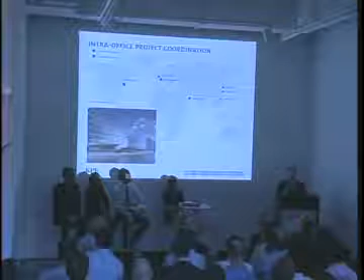We have 6 offices firm-wide. New York is the base for our operations, and what makes KPF unique, from what I've seen working extensively in London and New York, is that the offices work very collaboratively and live on any given project. Being an international firm, our projects are international as well as our offices.

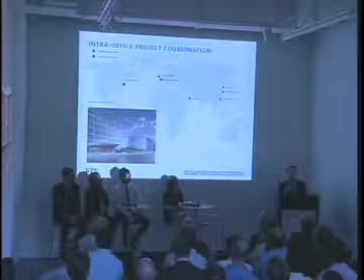Our projects range across all the continents, and where the projects are also influences the nature of our collaboration - who works on what and how we do it. This, for example, is a project in Paris, France - Parc du Millénaire. We're currently working on this project live with London and New York. The BIM strategy is a very total one for the firm - it helps us coordinate and collaborate so we share each other's specialisms.

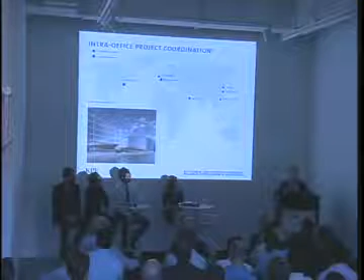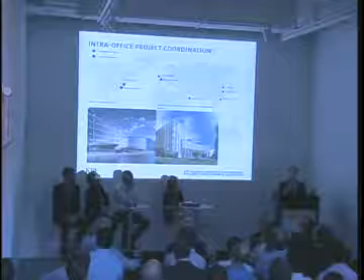The rest of the team will talk in much deeper detail about the technicalities of the software and how they use it. But BIM is the heart of our operations - Revit is the heart of our BIM strategy, with a plural BIM approach. When we're working live in London and New York, the Revit server serves as a live environment in which the whole office can work, and that goes the same for domestic projects too - the whole office has the ability to work simultaneously, live, in any given Revit model.

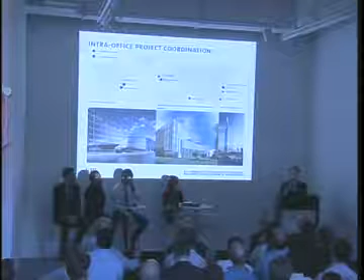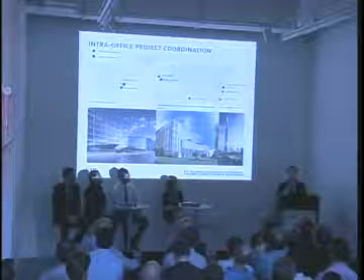So finally, the Asian projects too, and this example is the Lotte Tower in Seoul, Korea. One thing I want to expand on is working on the Revit server, and the huge breakthroughs that have happened in BIM, the big data, the cloud, which is a very commonly used term now. The big data for us means projects in Shanghai, Seoul, and the office working also live in this model. Now with Revit 2013, we've seen improvements in latency and the ability for Revit to comprehend files being sent transatlantic and transpacific. So some very exciting developments just in the industry as a whole, and Revit Server has really provided a great capacity for increasing the intra-firm coordination.

Not only intra-firm, but many firms hinge their collaboration with external disciplines, the structural, the electrical, the plumbing, the mechanical, and we like to put ourselves in the heart of that, the BIM methodologies, where we use either Navisworks or BIM 360 or a range of cloud-based model collaboration tools. It's really important to us to have that information flow in the cloud collaboration, internal and external.

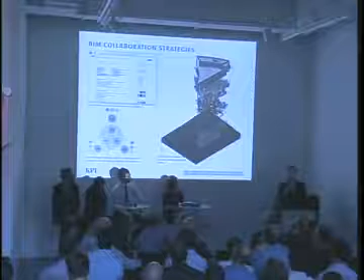The Revit project's based in the Revit server, but alongside the external collaboration, we have the internal knowledge bank, the KPF intranet, and the BIM procedures, the BIM execution plan, are used as a base for how we communicate and how we collaborate. The collaboration strategies are at the heart of what we would consider industry standard, as thorough as what they are in this current time.

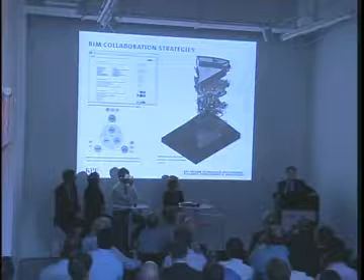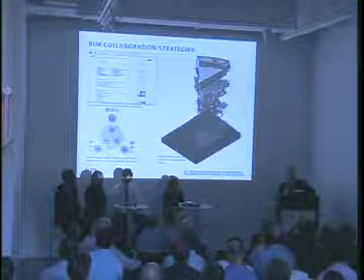As you see on the bottom left, the slide shows the AEC UK standard for Revit sharing. It's a shared environment. This is a typical IPD, and it's based on whatever the client's demands are, or the client communication for their needs, on how we share and how we integrate. We have a strategy for the extreme live IPD, which comes under the correct legal framework for the AIA contract, for example the B195 and the C195, and just the live collaboration is a very exciting development that is occurring, and we do look into it, but this is the standard procedure where we share each other's models in a shared

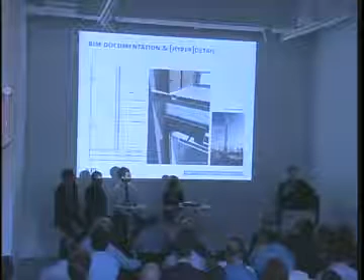platform. So as you have heard the word Revit quite a lot, I do like to emphasize that, and personally too, I have an extensive background in Bentley Systems, and the firm has done a lot of projects in generative components. I do like to advocate for a cross-BIM platform with a variety of approaches depending on what's relevant for each particular project.

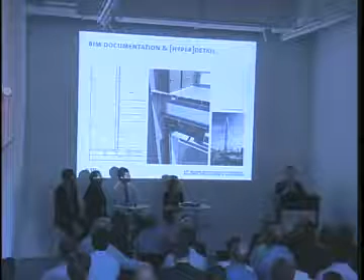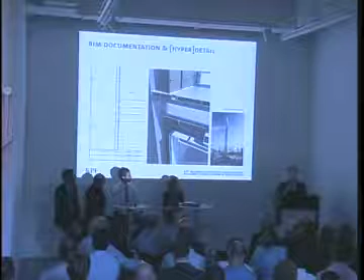Most of KPF's projects, I would say, really hinge heavily around the exterior envelope research and the significance of the envelope, especially with regard to environmental strategies and the concerns of the client too. It also involves very close collaboration with the fabrication technologies and curtain wall consultants, especially for a project on this scale for the Lotte Tower. Charlie's going to expand on his very thorough techniques he's developed in close communication with fabrication technologies, which involve the fabricators being able to use C++ scripting for their direct CNC cutting. Some very exciting technologies just in terms of raw integration in model sharing alone.

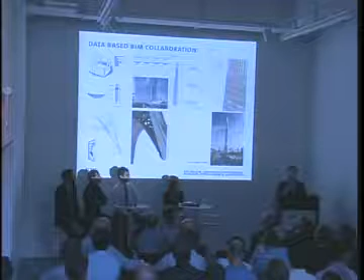So this extended to the structural research as well. In the Lotte Tower project, the exterior envelope is the heart of some very exciting developments in the physical and the digital world. A lot of optimization in terms of form, the environmental stresses that happen on the building, and how we as designers can best adapt to where this building's going, what it's doing, and what it looks like. It's very important for the local geography and the local culture.

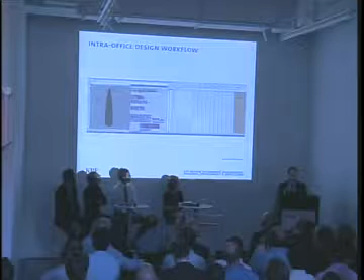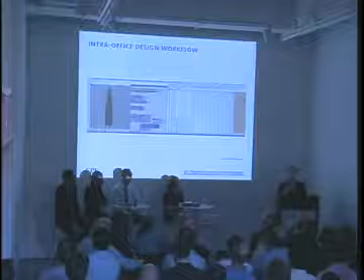So on the top right, you'll see a strategy that's really exciting, a very complex process that a team has worked on, which is a Grasshopper to Revit scripting workflow. There are many different options out there right now, some with just out-of-the-box add-ons, and some going back to the raw scripting C++ environment, or .NET, whichever one works. This exemplifies this process where we have a very extensive design process in Rhino, and Grasshopper is integral, like a lot of firms. Our challenge is to bring it back to the mega scale, the large, the super tall, and very often in a lot of the foreign or Asian projects, the exterior envelope is a big focus of our design strategies.

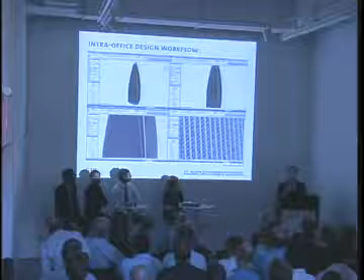And here you see coming back in a BIM environment, not just the digital model, but BIM—it is significant. The information and metadata contained in our models we take very seriously, in terms of the collaboration with construction managers and what that metadata is as part of our Revit strategy, and overall the communication. It's a language that is a very significant part of the digital workflow.

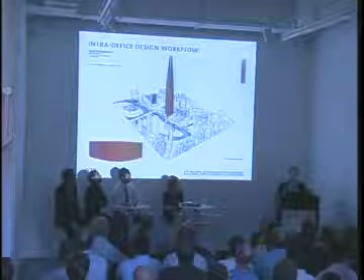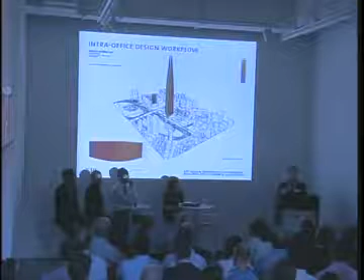So to quickly walk you through some of the environmental design optimization strategies we use at KPF—I'm part of our sustainability group, and the structure of that group within our firm is a network development. The idea is there's a group of us working on sustainability full-time, and our main goal is to help implement strategies and analysis that will help that come along with the teams.

Beyond that, we have an extended network that we're constantly giving software tutorials and education to, to further that development so they can eventually do some of the tasks we're doing—some of the more simple analysis—and then we can spend our time moving forward with some of the more advanced analysis.

The idea of the structure within the firm is there's a lot of back and forth. We're working on a lot of different projects with a lot of different teams, at many different stages of development.

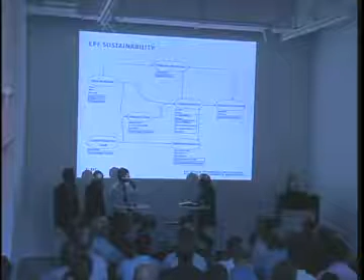So they'll give us a model, we'll run an analysis, we'll give them that model back. They'll tweak something as a result of that, and we might do a more detailed analysis to see how that's developed. Beyond that, we're working with all the different teams as well—the visualization groups, our extended network, and the day-to-day teams.

Beyond the software that we use, I think one of the things I wanted to talk about was the importance of the information you're putting into that model, and how that knowledge needs to be intelligent as well.

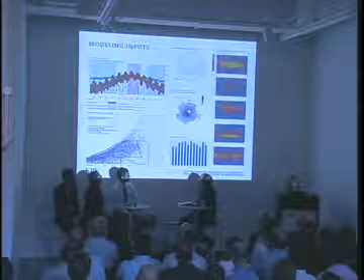One of the first things we do the minute we learn about a new project is create, if we don't already have it, the weather data for that project, and we sit down with the team to walk them through the significance of those images. What is the outdoor air temperature, what is the humidity, what are the passive strategies that will naturally extend the comfort zone, what is the rainfall, the wind, the sun path, and the radiation.

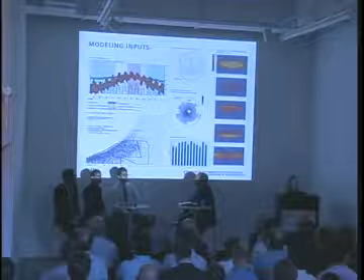These are all looking at a very standard distribution of these systems, and then we can begin to develop them for the individual building as the project develops.

This information is also available, along with a number of other pieces of data, on our internal intranet—the idea being that beyond just working with us, that information is available for them any hour of the day, every day of the week, should they want to access it.

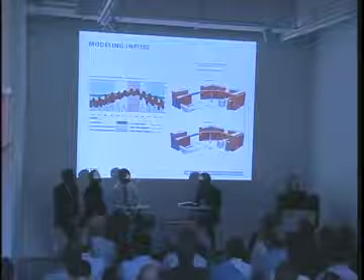One of the things that's very important, besides just understanding the context of your model, is understanding the climate that your model is in, what type of program you have, and what significance that's going to have on the modeling of your project.

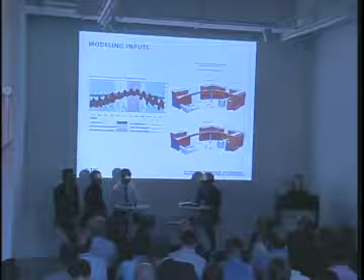This particular example was in Shanghai, China, an academic project. The climate had both a heating load and a cooling load because it has a summer and a winter, and because of that and the program, we wanted to mitigate some of the solar heat gain in summer but also allow for passive heating in winter. That meant you needed to be looking at both of those conditions as you were designing your shading devices to allow for both options.

On the other hand, this is a project in Abu Dhabi, and to a certain extent it doesn't matter what the program is because it's a hot climate all year round. This particular project was a resi, hotel, and retail, and our shading devices needed to be effective year-round.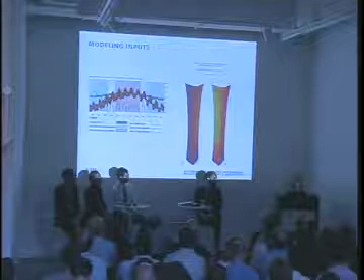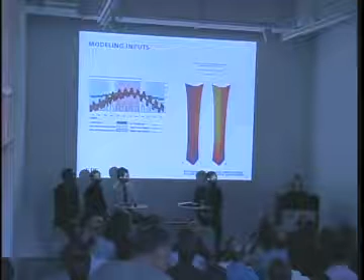This is an example in Beijing, China, which obviously does have a very distinct cold period that requires heating. However, it's a super tall office tower that is almost 100% offices, so it has very substantial interior heat load. So even though the way those shading devices change throughout the year changes with that climate, it still needs to be mitigating that heat all year round regardless. Knowing that information is really important to how you set up the models, regardless of the software you're using.

This is just a quick example of strategic facade analysis using very quick tools to begin to develop some quick feedback for a team using Solar Tool, understanding what is actually going to be effective before we begin to actually optimize a shading device.

The red areas on the right are highlighting 3 different facades on an airport project in Nanning, China. The idea is that none of these were true orientations, and they were all curving facades as well, so the way they were going to perform was not actually a standard predicted amount.

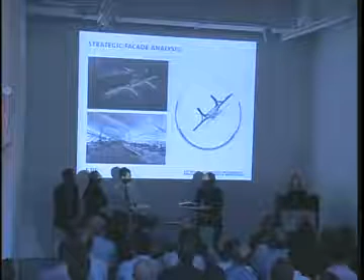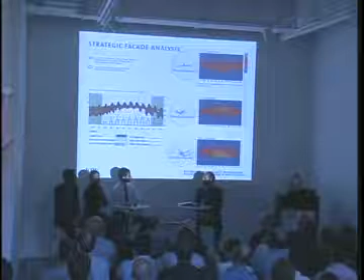The first thing we did was look at that climate data, looking at the coldest months of the year where some heat gain might be acceptable, and then looking at the times with the highest amounts of solar radiation, laying those two things out together on a sun path along with the orientation of the wall. This began to tell us where those shading devices would be most effective and at what times of the year before we actually began designing the shading devices.

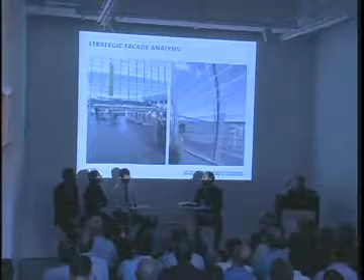This was just the quick result of that study, and the idea is that we're trying to maximize the effectiveness of those shading devices at the hottest time of the year, and they don't need to be as effective in the winter. And then that was the result across the building.

This is looking at how we would begin to do some of those optimization studies at the scale of the master plan. Before any analysis is done, we sit down with the team and develop a list of strategies. This particular project was just outside of Toronto, so it's a cold climate where you want to try to maximize passive solar heating, coming up with a list of strategies to help do that, regarding building orientation, program distribution, shadow coverage between the buildings, and the distribution of circulation space versus occupiable space.

Once that had been implemented and a massing model had been developed, we were then able to model that holistically within the site and begin to say, well, these are the individual buildings that need to be tweaked to further maximize these opportunities.

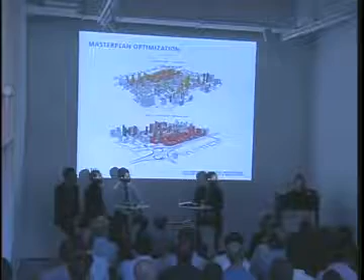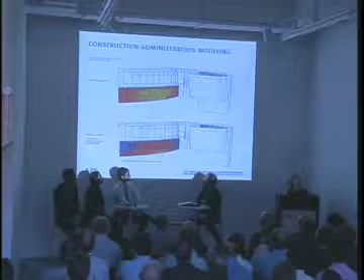One of the other things we do, as I mentioned, is work with projects at all different stages of development. This was a particular project that is in construction administration right now, very much in the process of being built. However, about a week ago, when the client saw the mock-up, they decided they did not like the shading devices that were going to be used. The problem is those same shading devices were also used for the LEED energy modeling, which is very linked to this project. It's an academic project, so they feel very strongly that it meets the target they've set out.

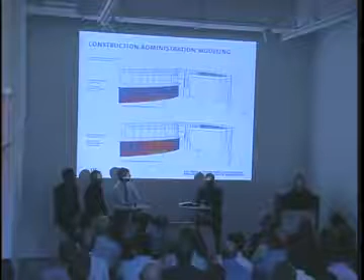So one of the things we were able to do was go back and look at what the initial performance of the shading devices was as currently designed, then test it for two variations they were looking at. We looked at whether the overall reduction in radiation was approximately equivalent, which would probably have a similar effect on the energy model, but also at the breakdown of that material across the different facades, so if they wanted to change the density on different orientations, they could have that opportunity.

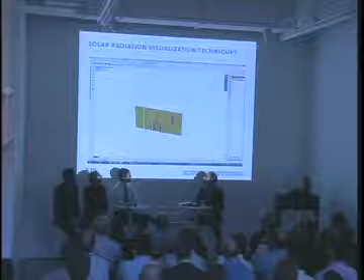One of the other things that comes up quite frequently when using tools like Ecotect is some of the quirks of the software. This particular example looks at the fact that the software runs its values of radiation as a direct result of the areas you're running it on. You can see here, even if you add up the average of the smaller pieces, the average amount of radiation falling on them is actually the same as the bigger pieces. However, some of them are being registered as completely in shade, and some are receiving a lot more radiation.

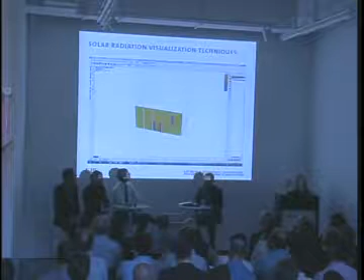So if it's a smaller scale, then graphically it's reading very differently. From my standpoint, what this means is we want our models subdivided in areas that are approximately equivalent, which can be an interesting challenge with a lot of curving facades. Ecotect is somewhat clunky software that doesn't always allow you control over subdivisions like that.

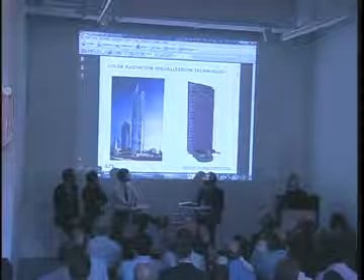One of the workarounds we've developed is subdividing things in Rhino, then working with our visualization team to bring that data into Ecotect more cleanly. This shows the same Rhino model already subdivided, rebuilding all those surfaces as 4-point squares in Ecotect and importing that data. That data can then run in Ecotect and import itself back into Rhino so the team can work with that information directly in their own model.

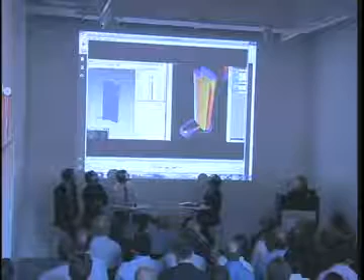And there you can see the model's been run, and then taking that data and importing it back into the original file.

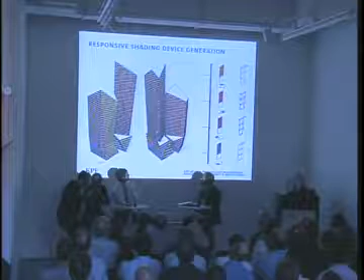One of the things technology allows us to do is responsive shading devices, allowing the team to work with this information much more directly.

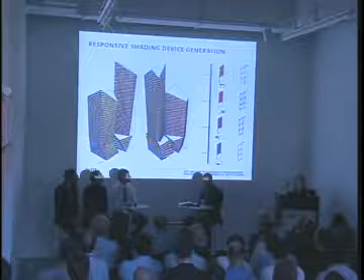In this particular example, it was a faceted building model that was self-shading itself in addition to the context, which meant a very varied amount of solar radiation across all the facades and even across individual facades. The design team developed different shading devices to correlate with those radiation amounts, with deeper shading devices on areas receiving the most sun, and shallower ones on areas receiving the least.

From a design standpoint, that data allowed them to play with different aesthetic options, looking at how it would be distributed with 3 shading devices, 6 shading devices across the facade, and with 12, and how those designs would begin to populate across a single building model.

My name is Charlie. A lot of my work at KPF encompasses working in some sort of computational parametric strategy. I work closely with the environmental network in our office, and also closely with the BIM individuals. Part of what Garrett just presented, the developing tools of interoperability, that's one of the things I work on.

But also taking all the stuff I've done over the past 5 years or so, and being able to integrate it into systems where now it's usable for users.

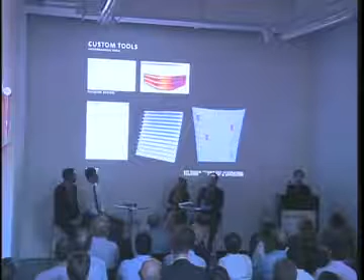I've always worked in code, and a lot of times when you talk to computational people, they talk about scripting and writing hardcore code, but it's usually a challenge to create an interface for everyone to use. Now with Grasshopper, it's pretty easy to create plugins and develop interfaces so no one has to go in and tweak your code around. You can easily attach parameters to that and so on.

One of the tools I'm working on with the environmental network is this shading device calculator, essentially. What it does is give us an interface where it can take any panel, any orientation, and with a series of parameters - louver depth, louver angle, roll angle, panel angle, orientation angle, so on and so forth - run through a series of different iterations.

It will output a number of optimal results. Some of those optimal results may not be visually appealing, but that's why it outputs a number of results, so the designer can take control and choose what is aesthetically appealing for the design.

Another aspect of what I do at KPF is trying to take the digital to physical. Digitally, we can do basically anything. Between the animation software and the geometry software out there, we can model almost anything, but how can we make that reality? Forces and physics and materials and so on.

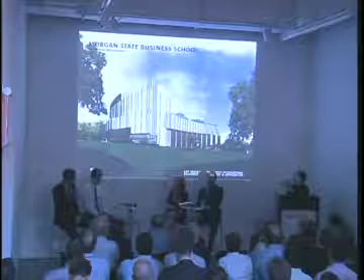This is a project in Baltimore at Morgan State University. It has a pretty limited budget, it's pretty tight. There are these metal panels throughout the facade - perforated metal panels - and the client loves them. The concept started with taking this painting.

We chose a portion of that painting that we thought would be a good contrasting option, and we essentially took the pixel values and generated perforations.

But we also thought about the constructability factors. If you have more than 40% perforations within the panel, you start to lose structural integrity depending on the thickness and so on. We also looked into, based on that image, the different perforation sizes, whether it was a regular orthogonal grid or a staggered grid, and took into consideration if the shapes overlap or not.

This is a laser cut mock-up that we did in the office, and we just spray painted it and put it up against the window.

So then based on that, we started talking to fabricators to see how much this would cost and how we can bring the cost within budget.

So we looked at 2 options: one was die punched, and one was plasma cut. We got to a point where we were able to control a lot of the parameters to sway the figures in our favor. Plasma cutting is based on time, and die cut is based on the number of dies.

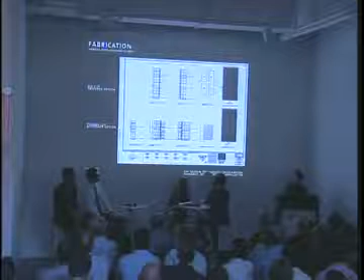They're still out for bid, and when we did the drawings, we put both options out there so there are alternatives, not just one method of fabrication.

There's another project I'm working on that I can't really show images about, but we're essentially going straight from geometry to machine code.

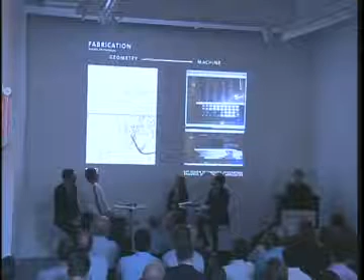A number of people said that this wouldn't be possible, but a 30-minute conversation with the technician let us go back and forth and figure out what the machine needed and what needed to be exported from the geometry, and we essentially figured it out. There's one or two minor hiccups we're ironing out right now, but otherwise it's been a pretty successful project.

A little hint - if you look at Architectural Record, you'll see an image of Bill Pedersen. That's pretty much all I can say.

A lot of what I do also is parametric modeling. So in this case, for the China Resources Tower, I work on a number of different projects.

For this project I didn't have a lot of time, so what I did was put an interface together that the design team can use. Between adding a few diagrams, some color coding, and some instructions, the team was able to use this to go through a series of different iterations for design changes.

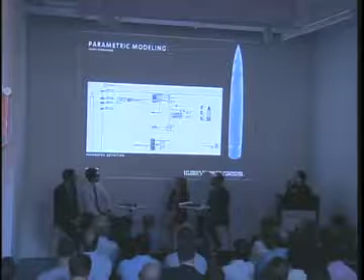And this is in the early schematic stage. So we can control the massing, control the diagrid expression, control the areas, and this is cutting the section through the building.

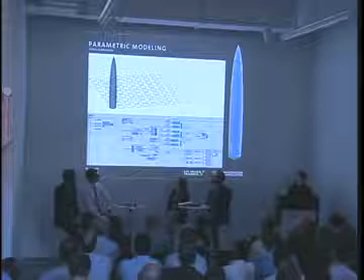As time progresses and the project progresses, we get a little more complex, where we start drawing blocks and exporting DWGs. So essentially, even in the very early stages of the project - this is still an early SD - we can control the project pretty well.

And this is just an image showing all the blocks and all the plans being generated.

This is a project I've been working on for 3 years, and we just finished the CDs for the large tower - it's a 2-phase project. This medium-sized tower on the left, the cladding will be done shortly, in a matter of days, and the piles for the rest of this have already been put into place.

But essentially, what this diagram shows is how we can take a concept. In this case, it was the concept of the sails, and for the facade expression it was this calligraphy figure, which is called the double happiness figure.

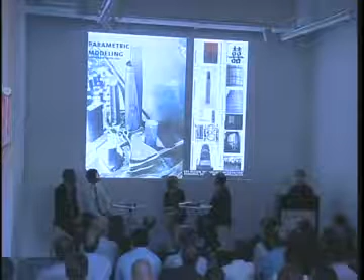We can take a concept, include parameters to it, put it into a model where we can start to quantify these things - curtain wall panel similarities. It's a double curved building, so we tried to see how we can find similarities within curtain wall panels within the pattern itself. The pattern is 28 unique panels, but once you go across the entire facade, you'll find similarities. And then going into drawing generation, mock-ups, and fabrication.

I'm going to switch to this real quick.

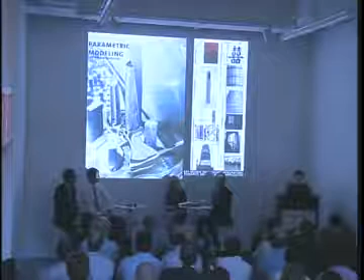The one great thing about the process behind all of that was that when it came to the shop drawings, we were talking about fractions of millimeters off on the curtain wall panels, to a point where one of our colleagues started making fun of us.

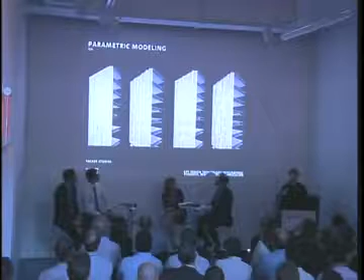This is another project in Beijing. It will be the tallest tower in Beijing. We do a lot of curtain wall studies, and for some of us it's easier to do quick manipulations in one program as opposed to another. So a lot of the studies were done using Rhino and Grasshopper and some scripting. But then the project had to be a BIM deliverable. So how do we go from a very free-form, unintelligent model, where the intelligence isn't attached to it anymore, to a more intelligent method?

What we've developed was essentially a routine where we can export all the curtain wall panels into a spreadsheet and read them in and repopulate them through Revit. And this is just showing the link that we've developed.

A little note on this: a lot of the Revit stuff was helpful because we do it on a number of projects, but it was also great working with a couple other individuals within the office to help develop this. And if you guys know Nathan Miller, his blog was very helpful in helping us develop this and put it together.

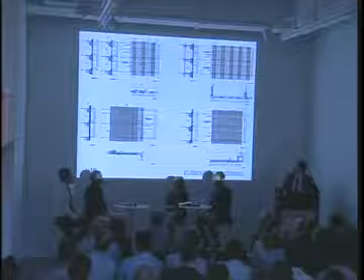The first one here was at the end of DD. At this point what I'm trying to show here is the 1 to 20 scale, which Revit is a really good tool for. On this, we tend to also incorporate detail components, which is a 2D method of drawing, as well as a 3D method. So in some cases we have our slabs and our beams and our curtain walls that are all 3D objects in the Revit model, but then we also have some details that we're drawing which are just 2D information.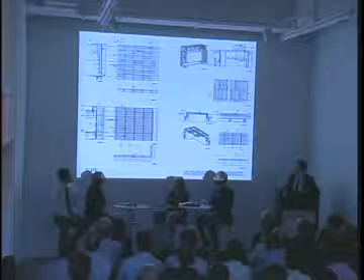This was a client in China, and unfortunately I can't show the overall building for confidentiality reasons. But as we were submitting all these documents, they were also requiring us to constantly give them visual and highly articulated 3D models. So this is kind of when Revit really becomes a drawing tool and is often used much like AutoCAD.

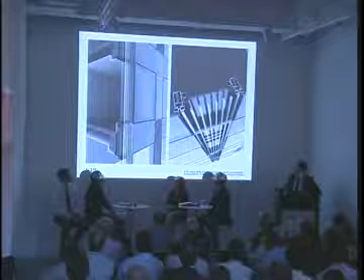So these are all detail components that don't really exist as 3D objects, probably because it would most likely crash our models. But what we managed to do was take that 3D information that existed in the model along with the 2D information and begin to overlay them. So in the case where there are objects going in the XY direction, we would simply shell; in the Z direction, we would extrude. And there was a point when our client actually said guys really don't need to build these things for real - so it was great that we managed to fool them.

So our stack joints, in this case, we had screens that were being developed, cladded in an aluminum veneer made to look like wood. It was a really effective tool and a very effective visual tool to show our design intent.

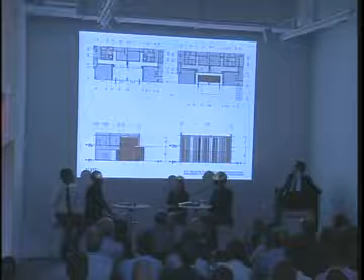Moving to a slightly larger scale, this is the same project. We were starting to look at two lobby interiors, one residential and one office, both in the same mixed-use building. As we're submitting these drawings, we're still going through a design process, and this was very fast-tracked. We moved from SD to DD in roughly a month and a half to two months, so it was a very intensive process.

This was our first use of conceptual models, which we were micro-modeling on the side and incorporating and linking into our project. They were asking for different iterations of screens in the residential lobby, one a little more classical in terms of proportionality, and then the same for the office lobby.

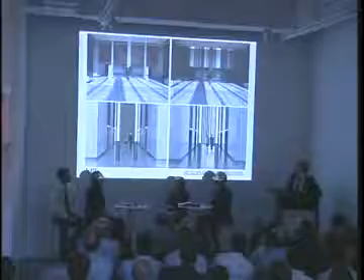We could quickly move from having very basic forms that also existed in our Revit model to showing them highly articulated. Keep in mind, everything shown here, except for the people and the plants, exists in our Revit model. So these are actual depictions of the documents going out.

For the lobbies, they kept asking for more classically themed things, so we decided to try and fool them by just introducing more traditional furniture. It was really effective, and they tended to be really excited about this process.

The last project right now is one we're in conceptual design for, about at our midterm point. In this case, we're moving with the design option at the overall building scale. Given the client and the culture, the demand for several options and several iterations can be a somewhat arduous and very intensive process.

We also had a very strict solar envelope that dictated the shape and some limitations on the height. So this was our attempt, our first pass at using and incorporating conceptual modeling.

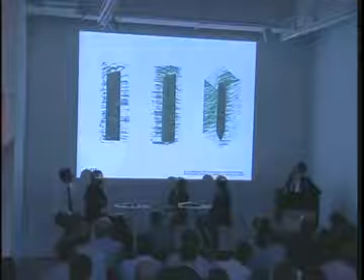In parallel with working with our environmental department, we also started using Vasari alongside Revit, taking our forms and actually running them through digital CFD models. This process can be quite costly.

I think it can give us useful information, though the accuracy is still up for debate. The thing with this is that we can at least get a sense of whether we're making the right moves, and how this is informing the shape of our building. So we could run it through that.

In parallel, incorporating a lot of what the environmental studio is doing, we were able to run the models through a plugin for it. We have the benefit of actually having the software, so having much more precise numbers, and then we get our final results that we can give out.

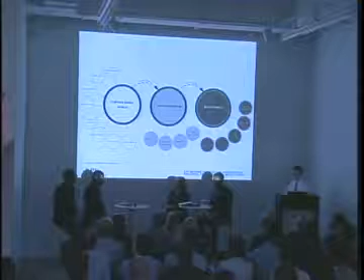Specifically in Hudson Yards, we've defined the massing in any number of softwares. We've been in Revit for a while now, but it started in Rhino, and I'm sure it's gone through Max many times. We define our modules, giving us a skeleton of points we can attach to all these modules of different sizes and pieces on the building. We extract those control points, then use them to apply types of walls and study them individually.

This application gives us the ability to schedule and extract tons of information out of every panel. Each panel knows, because we tell it, what its mullion depth is, what its spandrel area is, what its orientation is, whether it's a corner condition, whether it's a parapet condition, if it's got louvers, what its width, length, height, area is. So that's one way we really benefit from using Revit—just the ability to constantly schedule every panel on the project and associate as much information as we can.

Especially being on a project that we're going to be drawing all the way through construction documents, managing this information and having it constantly available—whether this project is going to be around for 5 more years, is the staff going to be around for 5 more years—new staff and old staff are constantly accessing the same information, and everything's tracking through, so nothing's getting lost from person to person, or from model upgrade to model upgrade, or Revit 2012 to Revit 2013.

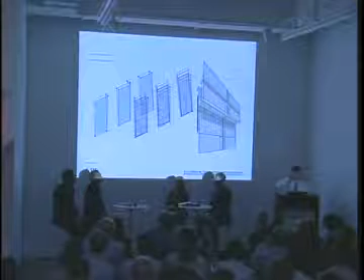The second type of wall is a shingle, and for all intents and purposes, we're just shifting a plane away from the face of the building every module, and we apply parameters to tell it how far to shift and what the slope of the building is to maintain horizontality on all the surfaces. There's 3 types, and since we're just pushing back one surface, we're basically adding 2 control points to every panel, controlling those points in addition to the 4 that are set out by the module.

Again, there's this one-to-one relationship that gets maintained through our FBX linking to Max, or whether we're rendering directly into Revit. The third panel is shifted in plan and section, and also the glass overhangs, with parameters associated with all of this.

If somebody gets daring overnight and wants to extend another 2 inches, it's not something that's going to take 2 weeks to track through all of our drawings. It's immediately updated—push of a button, adjust a parameter, adjust 2 parameters on this type of wall.

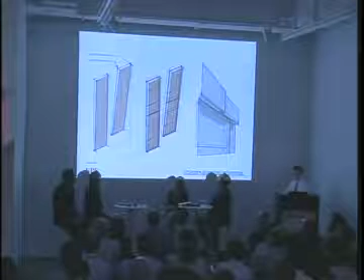Since it's pushing away from the facade in plan and in section, we need 3 additional points to control the facade, and basically we can achieve the overlap that you see on the right. And this is what it looks like in rendering.

Another great thing about Revit is that it really does well at identifying atypical conditions for you. As long as you've put in the right amount of information, you can say, okay, when is this edge length not enough? When is this thing out of plane? When is the surface area not accurate? You can really do well to identify and extract this information and basically identify problem areas before they come up.

This is how we are dealing with the crown of our building, which are obviously atypical curtain panels. We're able to develop, whether it's in office or contacting Case or contacting Autodesk or any of our go-to problem solvers, a way to model these things very quickly so we can keep up our pace of constantly changing.

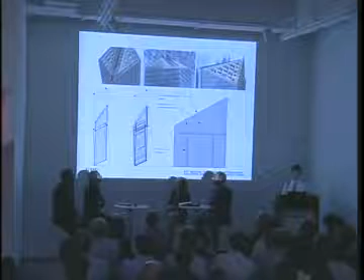This technique we sort of call piggyback. We just piggyback one panel on top of another one since we already have it modeled, and then we're able to sort of chop that panel because it's associated with the next one down. Same thing for all the edge conditions and corner conditions on all these panels.

We are able to basically analyze how efficient our design is. We originally used this technique to find the slopes of every wall. So as the modulation changed from 3/6 to 5 foot back and forth, we would set limits on how often we wanted panels to repeat, and that would set the slopes of the wall.

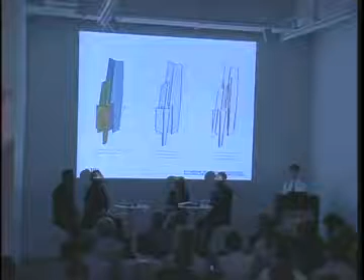This building has a tendency, as we've changed floor to floors over the year and changed the glass types and glass manufacturers over the year, we've been looking at optimizing this mass, and then we can always go back to the panelization of it in the same software and immediately extract how many atypical panels we have that are not following the rules. Then we can go back and stitch these techniques back together per panel type by piggybacking onto adjacent panels. We can still maintain surface areas, and they're still very clean for the drawings and renderings that we have to constantly extract.

So all of this work we do, and I do on a day-to-day basis, keeps these pretty pictures up to date and accurate for everybody on our design staff who needs them constantly. And then hopefully it's applying to the pretty picture overall for the entire site.